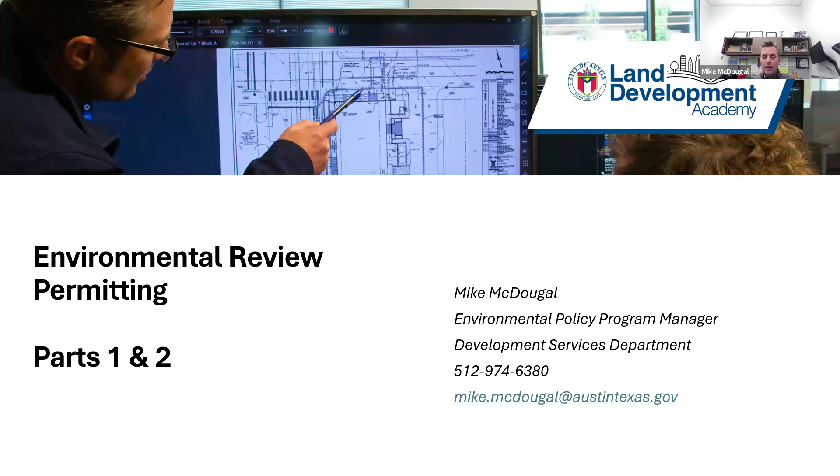Bianca had mentioned this as far as the engagement format a minute ago. Bianca, did you want to speak to this or should I go on to the next slide? Go ahead. I think I covered it. Okay, I think so. Thanks.

So we'll cover 2 hours today, probably a little bit less. We'll take a break and there will be time for questions at the end of the day and several times during the presentation. So we are covering yesterday and today a total of 8 topics. Yesterday we covered 4 and today we'll cover the next 4.

Yesterday we covered the watershed classifications and regulations, impervious cover, construction on slopes, and the grading limits and grading administrative variances. And today we'll cover critical water quality zone regulations, water quality transition zone regulations, erosion sedimentation control requirements, and landscape requirements and compatibility requirements.

And so actually that brings us to our first question break. I just want to give an opportunity to see if anybody wanted to ask a question about what we covered yesterday, clarification. So Bianca, are there any questions at this point? Yes, I do have one question that was in the chat box, but I'll ask y'all to please do enter your questions into the Q&A box. That helps me to keep track of them when I'm writing up the written summaries for everyone. But I'll go ahead and read this one from the chat.

It says, do the site plan application instructions for water quality and drainage plan requiring a payment to city in lieu of water quality pond apply? So that sounds like the fee in lieu question. That's actually reviewed by the water quality drainage team, and that's a different team than the environmental team, my team. But my understanding is that in some areas of the city, rather than providing a water quality pond, a person can pay into something called fee in lieu. It's a water quality pond fund.

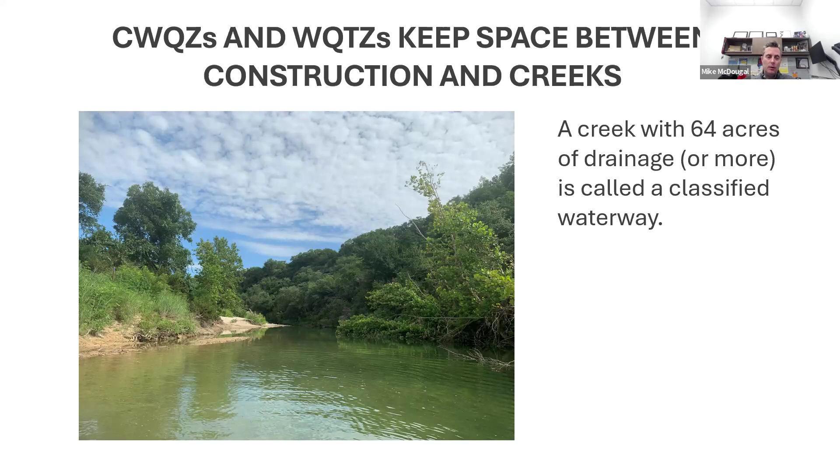And so if a creek has 64 acres of drainage or more, it's called a classified waterway. Obviously land drains to the creeks, and a certain square footage or acreage of land will drain to a creek. And so once 64 acres of land drains to a creek, it becomes a classified waterway, which means that it has this no build or low build area adjacent to the creek. That is, once a creek has 64 acres of drainage going to it, it has a critical water quality zone and possibly also a water quality transition zone. And the Land Development Code limits development adjacent to these creeks when they have at least 64 acres of drainage.

And so a classified waterway will have a critical water quality zone, or CWQZ. In the drinking water protection zone, there will also be a water quality transition zone. To give a little more background on that, a creek with 64 acres of drainage in any watershed in the city will have a critical water quality zone. If we're in the western three watersheds, water supply suburban, water supply rural, or Barton Springs zone, if there's a critical water quality zone, then there will also be a water quality transition zone. I will have a slide showing what that looks like coming up. But basically, 64 acres means critical in the urban and suburban. 64 acres in the western three watersheds means there's a critical and a transition zone.

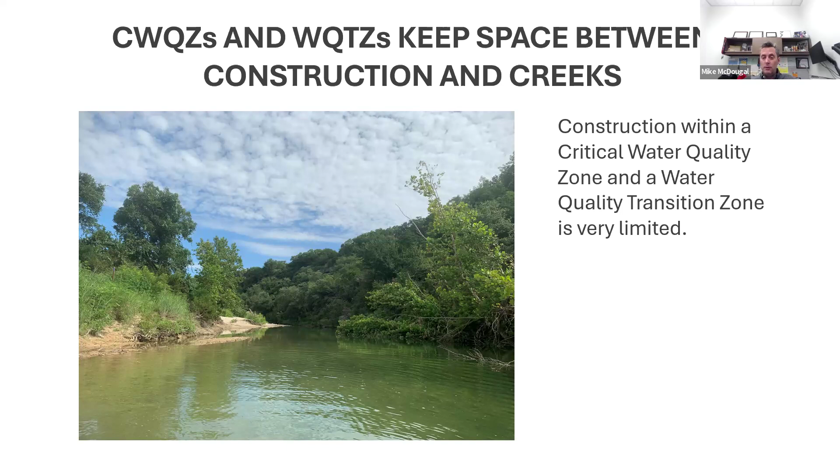As I mentioned before, construction in the critical water quality zone and the water quality transition zone is very limited. So why do we limit construction adjacent to creeks? Well, ECM section 1.5.1 says by promoting healthy soils and vegetation along the creek corridor and allowing the stream adequate space to migrate over time, stream buffers help control flood impacts, reduce channel erosion and property loss, help maintain good water quality, reduce operation and maintenance costs, and provide multiple community benefits.

To put that in simpler terms, the vegetation found along the creeks can intercept pollution and stormwater runoff, and it can slow how quickly the pollution gets to the creeks. It can also capture or break down the pollution to some extent. So having this vegetation preserved along the creeks provides free water quality for the city, so for all of us. By preserving the vegetation along the creeks, we help keep the water quality improved.

So, for example, in older parts of the city, like off of Hancock, the Yarborough Branch Library parking lot drains directly to the creek. So if you imagine any oil that leaks out of a car goes right to the creek, not very good. That was done 50 years ago or so. More modern requirements say no, you can't drain a parking lot directly to the creek. We want some space so that pollution doesn't get right into the creek right away and immediately affect the water quality.

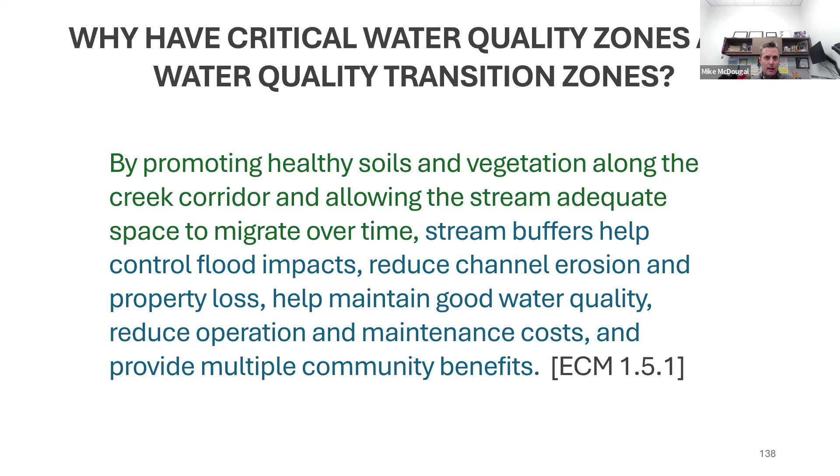Second, by preserving the vegetation, it also allows room for the animals. A lot of animals will live in or around the water. They'll live in the water, crawl out of the water to reproduce, go back into the water, and they need this vegetation along the creek as part of their habitat. So we want to preserve the vegetation for water quality, but also to keep the local ecosystem intact, give the critters space to live, reproduce, and eat.

So as I mentioned waterway setbacks a second ago. The critical water quality zones and water quality transition zones are collectively called waterway setbacks. So if your environmental reviewer says there's a waterway setback along this creek, that's just a simpler way of saying there's a critical water quality zone and possibly a water quality transition zone along the creek. It just means an area of limited construction adjacent to the creek.

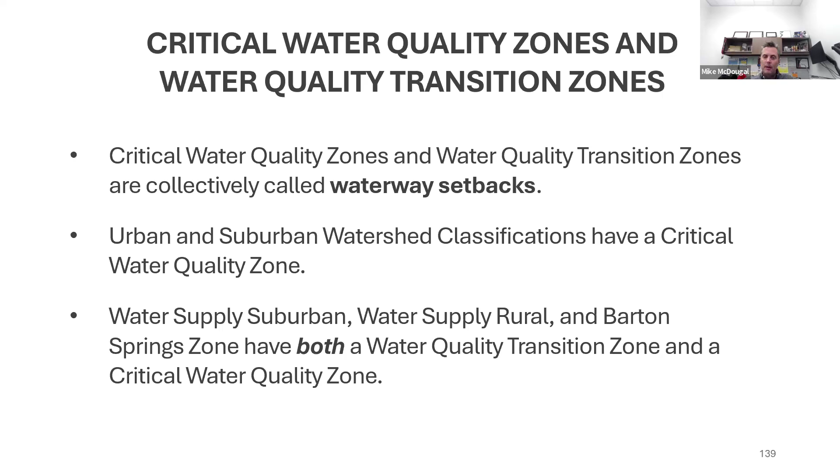Urban and suburban watershed classifications have a critical water quality zone, just the critical, when there's 64 acres of drainage. The water supply suburban, water supply rural, and Barton Springs zone have both the water quality transition zone and a critical water quality zone. And so, again, 64 acres of drainage means there's a critical.

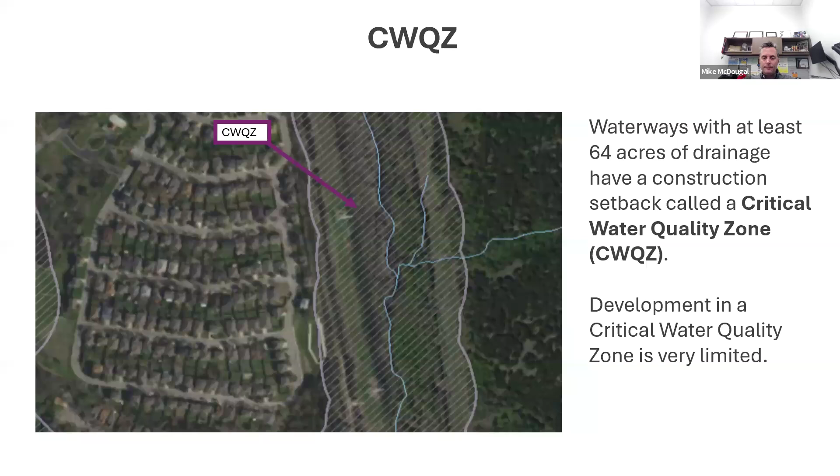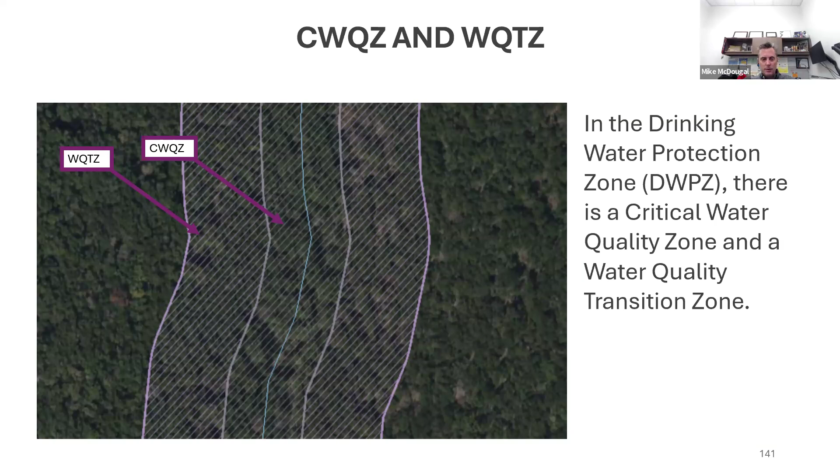This is an image from the drinking water protection zone. And so you can see the creek center line down the middle. The inner hash mark is the critical water quality zone. The outer hash mark is the water quality transition zone. So the critical water quality zone is just a band on each side of the creek. And then if there's a transition zone, there's another band outside the critical. So just a series of parallel bands limiting construction adjacent to the creek.

So what is allowed in the critical water quality zone? I mentioned there's a lot of development restrictions. Well, that's in LDC 25-8-261. And 25-8-261 starts off by saying development is prohibited in a critical water quality zone. And then it says except, and it goes into substantial detail describing what is allowed. This is also clarified in ECM 1.5.3. So fundamentally, the Land Development Code says no development in the critical water quality zone except, so thou shalt not, and then it has a lot of exclusions where, okay, you can do this in the critical. A lot of those exceptions then have additional requirements.

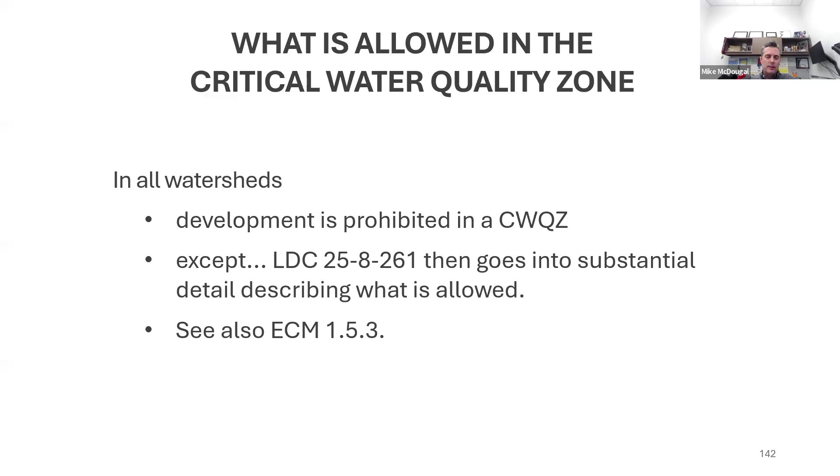So what was an example of one of those exceptions? What might be allowed in the critical? Well, the code says you can't build in the critical, and then when it says except, one of the exceptions is that utilities may cross directly into or through the critical water quality zone. Obviously, water utility power has to cross creeks. Another exception of what is allowed in the critical is a public street. Open space is allowed, and parkland is allowed in the critical water quality zone.

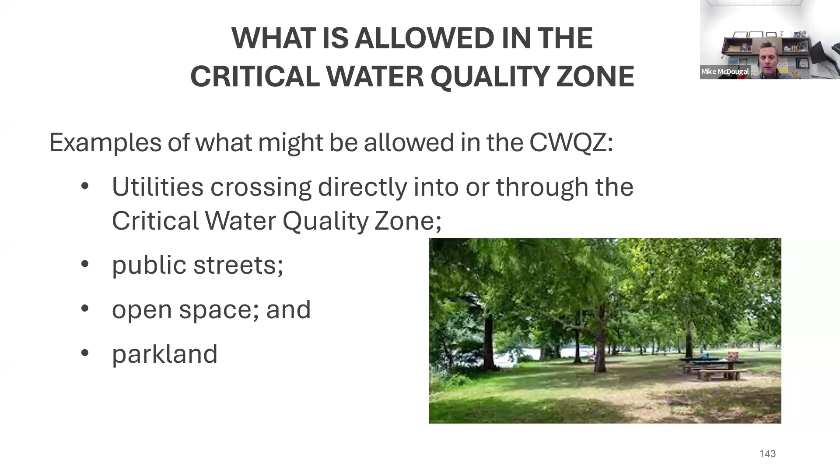So there's a long list of exceptions, and if there's a critical water quality zone on a property that's going to be developed, I would say call your environmental reviewer sooner rather than later, just to get an idea of what might be allowed, what options might exist. Certainly, it's always easy to adjust the design early in the process. But essentially, nothing's allowed in the critical except what's listed as the exclusions or exceptions.

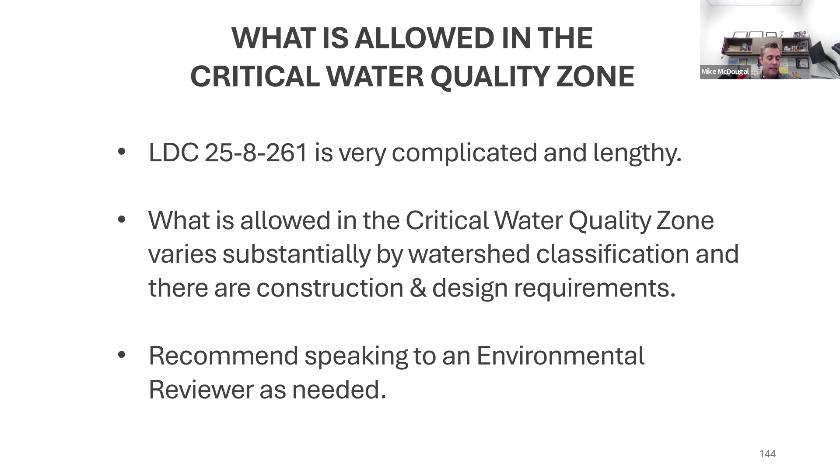So 25-8-261 is complicated and lengthy. What is allowed in the critical water quality zone varies substantially by watershed classification, and there are construction and design requirements. So, yep, as I mentioned a second ago, I recommend speaking to an environmental reviewer as needed just to get a handle on it.

Yesterday, I mentioned that there are administrative variances in the code, and they're all in 25-8-42. There are some administrative variances that apply to the critical water quality zone. Not many, but a few. So one of them is that 25-8-42 includes an administrative variance to allow a private driveway or a public street to cross a critical water quality zone if we're not in the Barton Springs zone. There are some design requirements and some conditions associated with that.

But basically, if somebody cannot access the right of way from their property without crossing the critical, it might be possible to get an administrative variance. And that can be tremendous because it's much quicker and much less expensive than a land use commission variance.

LDC 25-8-262 describes when a public road or private driveway may cross the critical. So 25-8-262 gives allowances for these crossings. If that doesn't fit, perhaps 25-8-42 will give us an administrative variance option. So there's a handful of places in code where we might build across the critical with a driveway or a street. And again, design requirements and site conditions are lengthy.

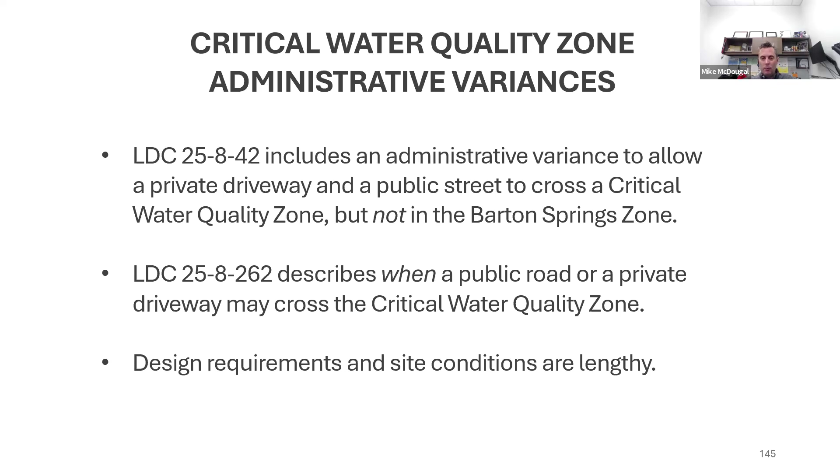So I would recommend if you're looking at a street crossing of the critical or a driveway crossing of the critical, please call your environmental reviewer to discuss that and figure out how to get a handle on that.

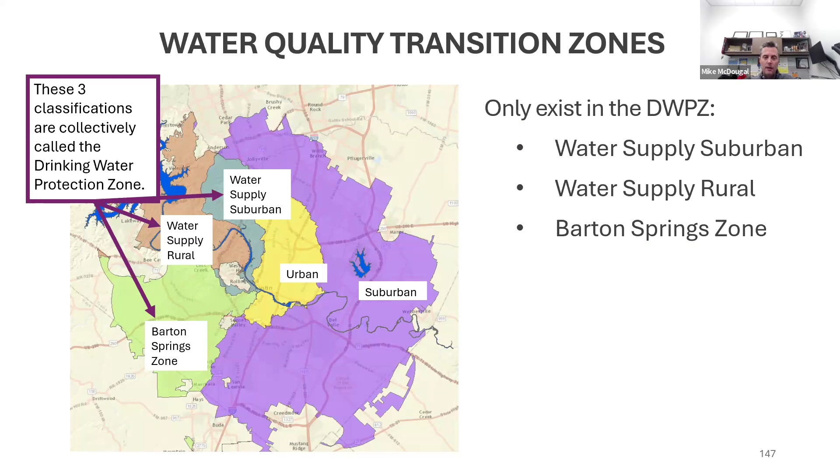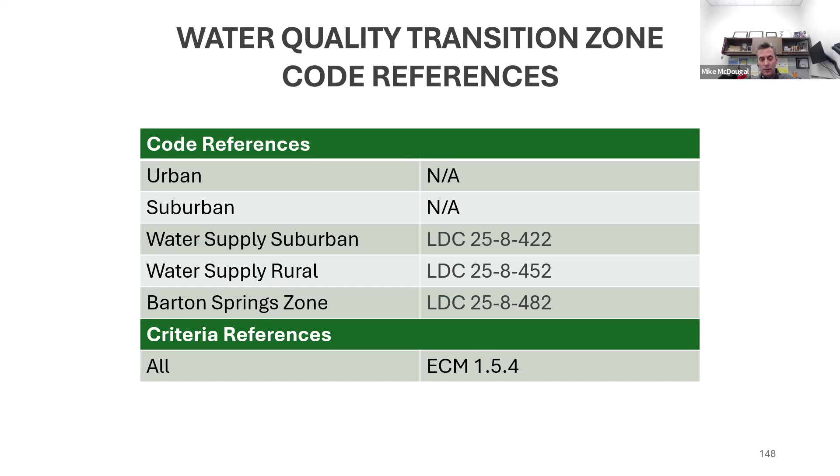So what is allowed in the water quality transition zone? Well, it varies based on the watershed classification and the recharge zone status. So if we're water supply suburban and over the South Edwards Aquifer recharge zone, whatever's allowed in the critical is also allowed in the transition zone. And also, beyond that, minor drainage facilities or water quality controls that comply with LDC 25-8-263 floodplain modification and the floodplain modification criteria in the ECM are allowed.

So what does all this mean? Well, water supply suburban plus South Edwards recharge zone, the transition zone equals the critical. Whatever's allowed in the critical is allowed in the transition zone, and also some minor drainage or water quality control facilities. And how that's defined is in the code and criteria as well. So the transition zone is typically equal to the critical plus a little bit more.

So if we're not over the South Edwards Aquifer recharge zone and water supply suburban, then it just has a lower impervious cover limit of 18%. So if we're adjacent to a creek in water supply suburban in the transition zone and not the South Edwards Aquifer recharge zone, the impervious cover limit is just 18%. This does not include the area in the 100-year floodplain.

So it gets a little bit more confusing because it's water supply suburban, not South Edwards Aquifer recharge zone, transition zone, but not floodplain. So there's a lot of layers, a lot of filters in that consideration. But once we clear all those, it's just an impervious cover limit of 18%.

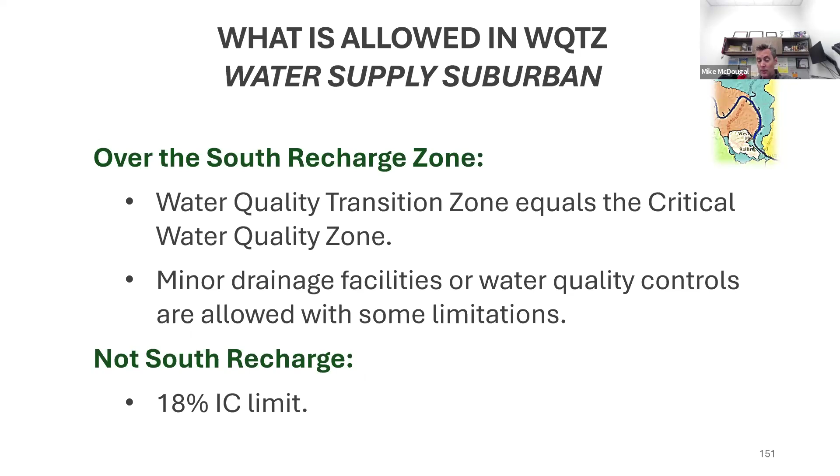So to summarize, if we're water supply suburban over the South Edwards recharge zone, the transition zone equals the critical, and also minor drainage facilities or water quality controls are allowed with some limitations. If we're water supply suburban transition zone, but not over the recharge zone, it's just an 18% impervious cover limit.

A second of the three western watersheds is water supply rural. And so if we are a transition zone, water supply rural, over the South Edwards Aquifer recharge zone, development allowed in the critical is allowed in the transition zone, plus also minor drainage facilities or water quality controls. So this is very similar to what we saw a second ago for water supply suburban. So water supply rural, transition zone, South Edwards Aquifer recharge zone: transition zone equals the critical, but also we can have minor drainage facilities or water quality controls.

What if we're not over the recharge zone? It gets very confusing because we're dealing with watershed classification, how far we are from a creek, and whether or not we're over an aquifer recharge zone. So if we're not over the recharge zone, you can do in the transition zone what's allowed in the critical. Streets or public mobility projects are allowed. Yet again, minor drainage facilities or water quality controls are allowed. And then we can have duplex or single family residential development.

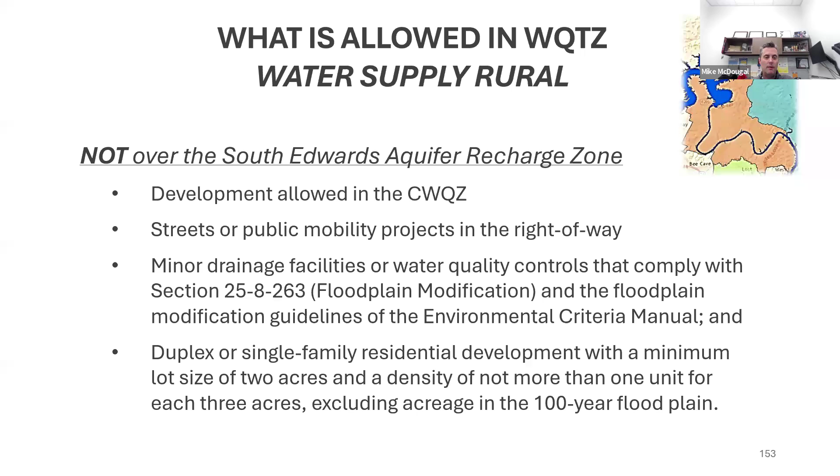And yesterday I mentioned that kind of peculiar ratio. It pops up again. So for a transition zone in this situation, duplex or single family residential development with a minimum lot size of 2 acres and a density of not more than 1 unit for each 3 acres, excluding acreage in the 100-year floodplain. So what this tells us is that we can also have single family and duplex in the transition zone of water supply rural if we're not over the recharge zone. It can get very, very detail oriented, kind of a rabbit hole. So yet again, if there's a transition zone, I recommend calling the environmental reviewer to discuss the regulations.

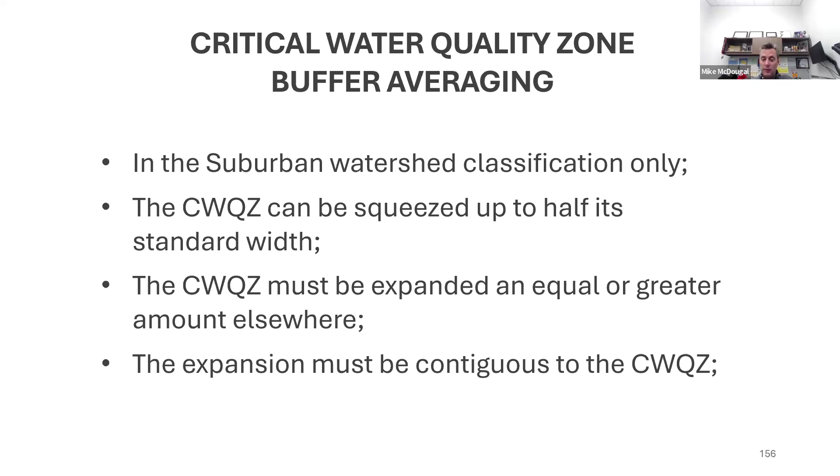Now, speaking of options, in the critical water quality zone, only in the suburban watershed, there's something called buffer averaging, just the suburban watershed and just for the critical. And so the basic concept is, rather than move the development outside the critical, we can move the critical away from the development. So the critical water quality zone can be squeezed up to half its standard width. The critical must be expanded to an equal or greater amount elsewhere. And the expansion must be contiguous to the critical water quality zone. The expansion should maintain a reasonable connection with the functions of the riparian zone and floodplain. The expansion area should not be over CEFs.

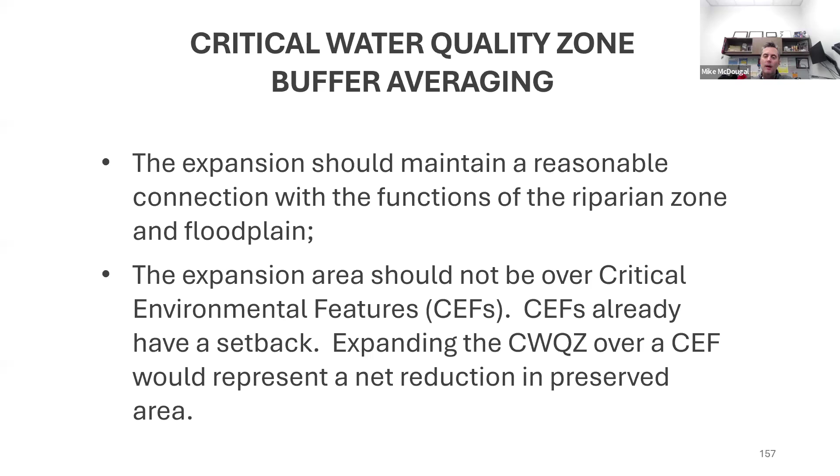What does all this mean? It's like squeezing a balloon. In the suburban watershed, you can squeeze the critical up to half its width. It's just going to pop out somewhere else, just like squeezing a balloon. And that's a very simple way to describe it, but I think it's an effective way.

You can move the critical water quality zone in the suburban watershed, just like squeezing a balloon. You squeeze it up to half its width, it'll just pop out somewhere else. These requirements are in ECM 1.5.2.D and LDC 25-8-92(B)(4). But the takeaway is there's some flexibility.

Instead of designing around the critical in the suburban watershed, maybe we can design the critical around the development. So we just move things around a little bit. And I've certainly seen that used as a helpful way to get out of variances and still comply with code and protect the water quality of the creek as needed.

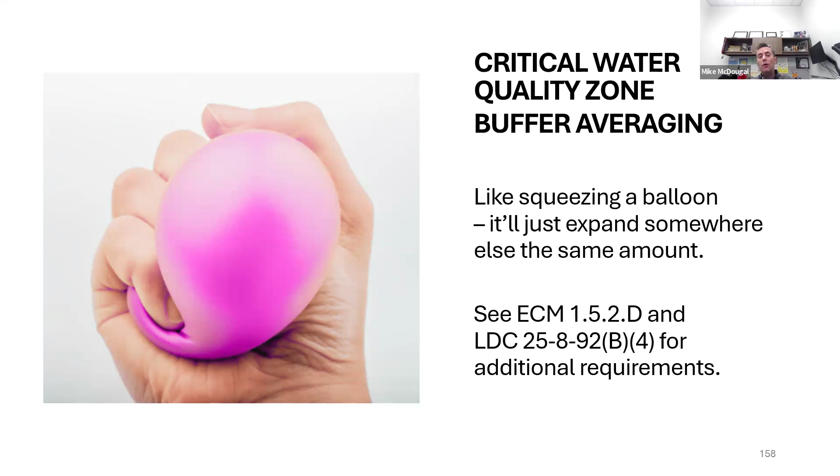And with that, I will ask if there are any questions, Bianca. Yes, we've got a couple of questions here in the Q&A box. So, first question: when a larger development adjusts the point where the critical water quality zone starts, at 64 acres, does the existing critical water quality zone still apply, or does only the proposed critical water quality zone apply? Does the same apply for the impacted water quality transition zone?

So if I understand the question correctly, somebody builds something directly upstream at the beginning of the critical, and in doing that, they change the amount of water draining to the creek. And so if they do that so that there's no longer 64 acres draining to the creek, is there still a critical? And actually, I'm not certain. Typically that's something that the Watershed Protection Department would look at.

I believe that if the development changes the flow and it's built legally into the uplands, the Watershed Protection Department would say, okay, we see there's not 64 acres of drainage anymore based on this legally built project. So the critical water quality zone would be adjusted downstream. I believe that's how that's done. It doesn't happen very often, so I can't speak to it absolutely.

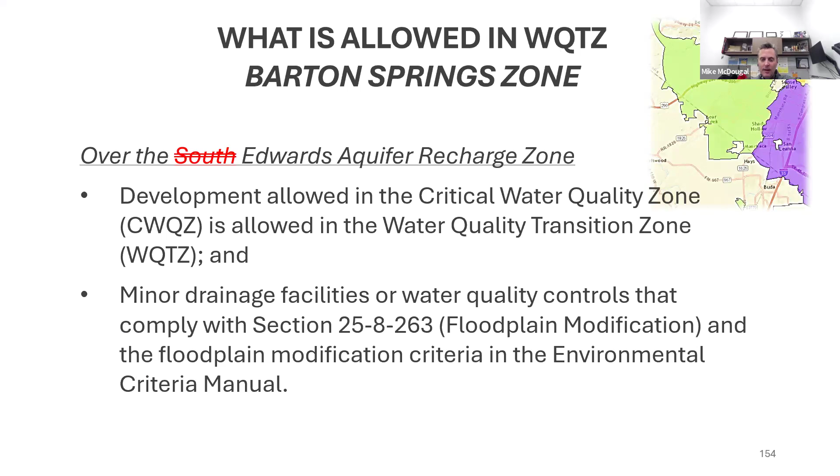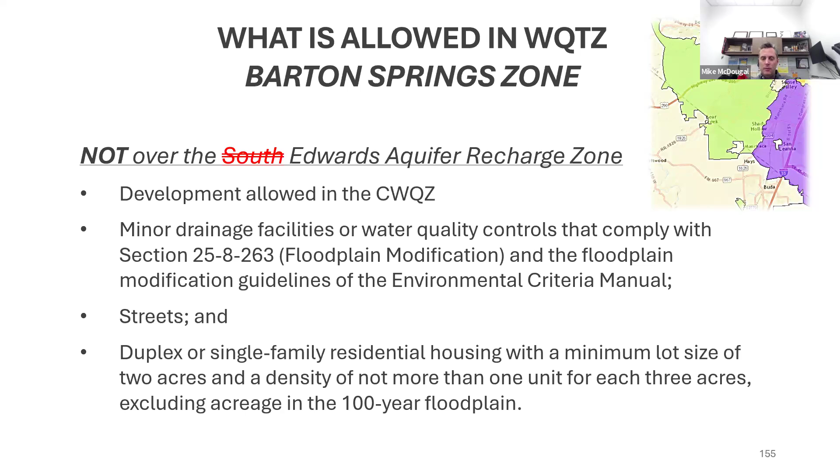Yeah, that's totally fine. We don't expect you to actually be the book, but if you can point us to the book, that's good. I can show where that is though. Okay. Minor drainage facilities have to comply with 25-8-263. And then let's see. I believe I had a criteria reference as well. It's going to be ECM section 1, but where in section 1? I would have to look. But 25-8-263 in either ECM section 1.4 or 1.5 would be the definition of what constitutes minor drainage facilities or water quality controls.

So this one's a little bit simpler, happily, since we've covered a lot of complicated material in a lot of detail. Erosion sedimentation control requirements. And that's just the 18-inch tall black fabric fence that people see around construction sites. And so when land is developed, well, actually, I'll read the slide a little more clearly.

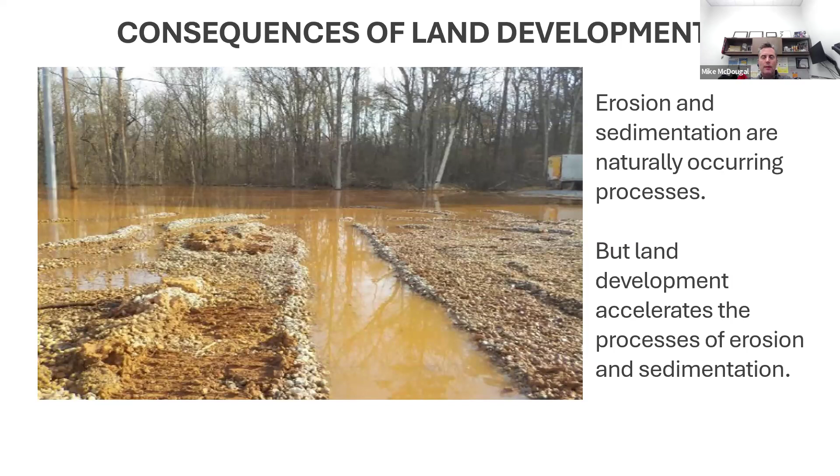The vegetation is destroyed. So when construction occurs, it's easy for soil to wash off the site. And when it washes off the site, it does this to our creeks. It's not good for us to drink this water. It's expensive to treat this water to make it drinkable. And so the City of Austin requires silt fence, erosion sedimentation control, that black fabric fence around construction sites.

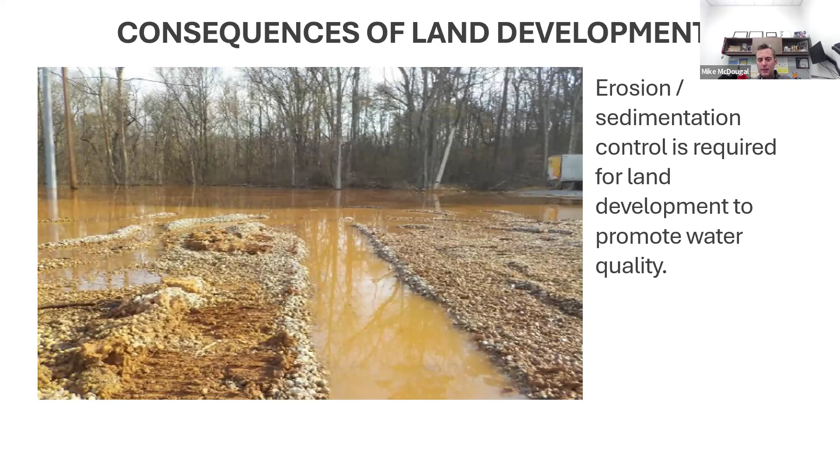So as I mentioned, sediment transport to waterways can affect water quality. Too much erosion and sedimentation negatively impact the city's drinking water supply and the ecosystem. So erosion and sedimentation control is required for land development to promote water quality. And actually, providing erosion control is a city, state, and federal requirement. The city requirements exceed the state and federal requirements.

And so there are various ways to prevent erosion from occurring. And one of them, obviously, we can put that black silt fence to hold the soil back. Another way to prevent a lot of erosion from occurring is to minimize the area of the site that is disturbed at any one time during construction. That is, minimize how much area of vegetation is removed. If the vegetation is left in place, the soil will stay in place. Preserving the existing natural vegetation to the greatest extent feasible.

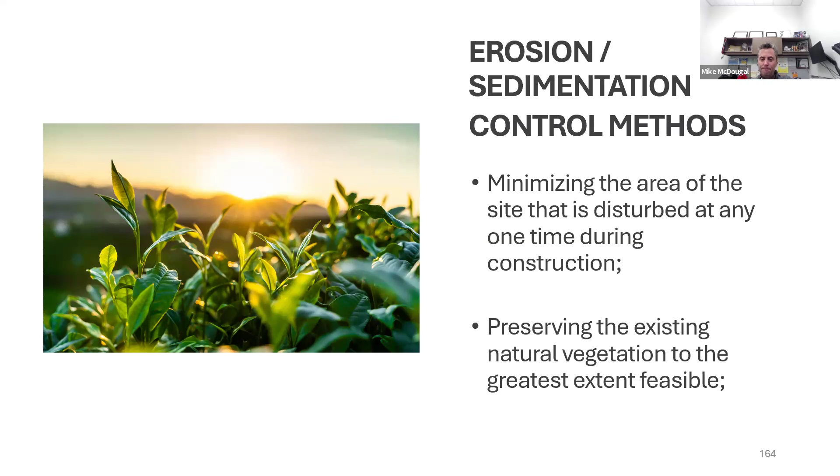Other methods are covering exposed soils with temporary stabilization soon after disturbance. So that could be a tarp. If it's a small area, that can be wood chips. That can be, I think, let's see, filter fabric. All sorts of things. We can restore the vegetation as rapidly as possible in the disturbed areas. So when the soil is exposed, get the vegetation growing back there as soon as possible to help keep the soil in place.

Keep the velocity of stormwater below the erosive level. So obviously, the steeper the site, the faster the water will run off the site. The faster it runs, the more erosion will occur. So we want to develop the flatter sites, not the more steep sites. Promoting sheet flow rather than concentrated flow. Obviously, if there's a sheet flow of water across the site, that's going to have less impact than if we just have a gully being washed out on a site, taking a lot of sediment with it.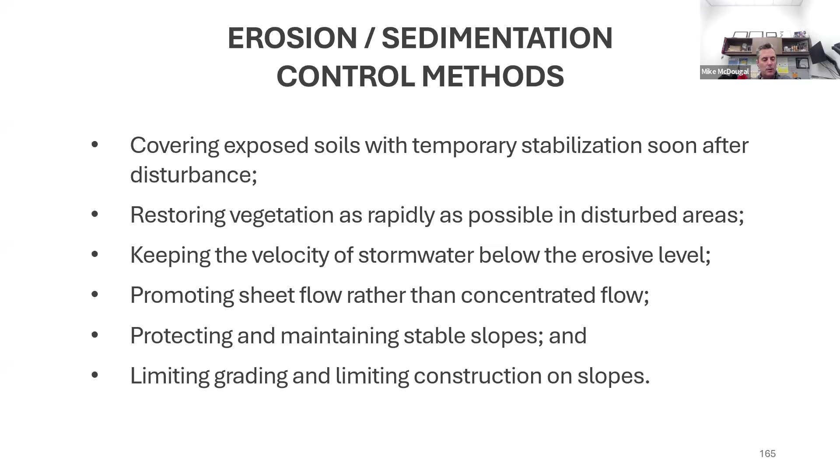Protecting and maintaining stable slopes, and limiting grading and limiting construction on slopes. So when I mentioned yesterday where the city limits the amount of fill that's allowed on a site, the city limits the construction allowed on slopes over 15%. The reason is in part to keep the soil in place. The more fill there is, the more soil can wash off during construction. The steeper the slope, the more likely the soil will wash off during construction.

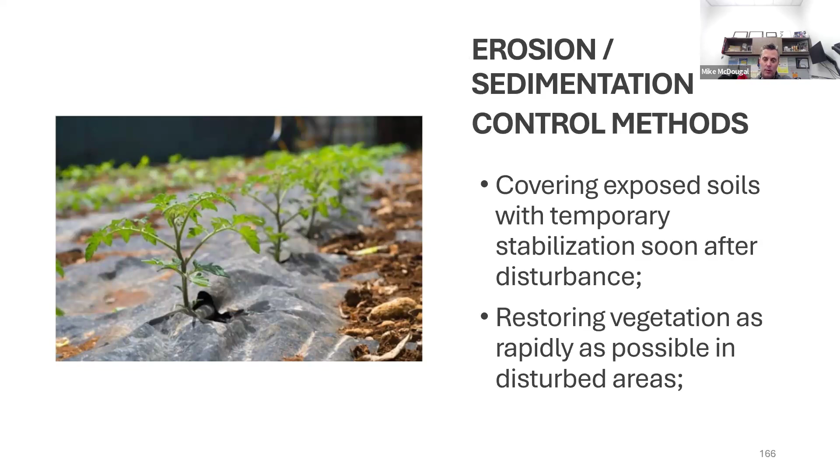So, let's see, I mentioned covering exposed soils with temporary stabilization soon after disturbance, restoring vegetation as rapidly as possible in disturbed areas. These ideas are just basically, as soon as we can, we want to get that vegetation put back to keep the soil in place, a good erosion control method.

Another way to keep the soil within the limit of construction is with temporary sediment basins and dewatering skimmers. So the ECM Appendix P1 or P4 sequence of construction says that rough grading the ponds has to be done early in the process. So if the ponds are rough graded to full capacity, those ponds can actually act as sediment basins. So in a perfect scenario, and a lot of things have to occur for this to work out properly, and that's something the environmental reviewer would look for.

If the sediment basins are rough graded at the start of construction, any soil that's washed away will find its way to those basins instead of washing off site. So we could look at sediment at the ponds acting as temporary sediment basins to capture the soil, and we want dewatering skimmers to skim the water off the top of these basins so they don't fill up. And so the idea is the water is skimmed off the top, and the sediment drops to the bottom of the pond.

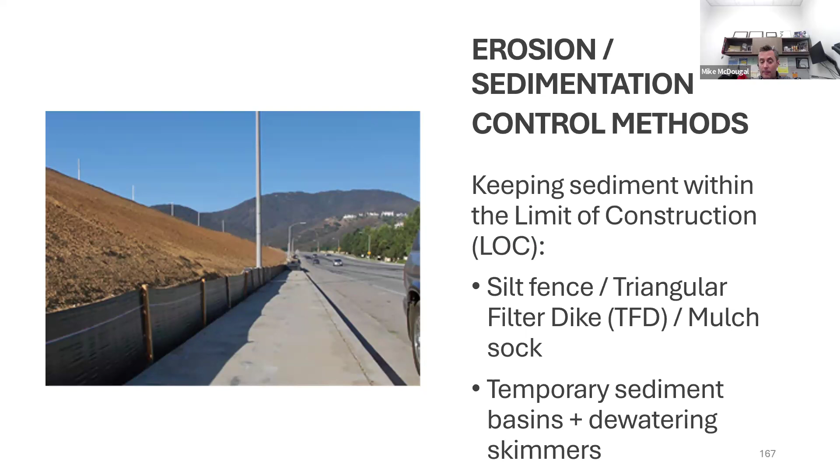So as I mentioned, silt fence is one of the erosion sedimentation control techniques. So silt fence acts as a barrier or a dam to keep surface water and sediment on site. So in this image, you can see that the water is kind of being ponded by this silt fence. If we're keeping the water on site, then we're keeping the sediment suspended in that water on site as well, which is a good thing. And so the city looks at silt fence as basically a dam.

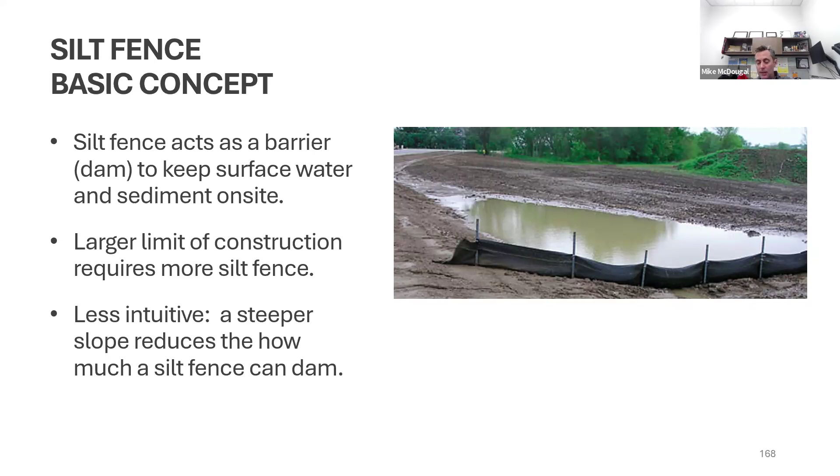And so a larger limit of construction would require more silt fence. So, the bigger your construction, the bigger the dam has to be. Less intuitive is that a steeper slope reduces how much a silt fence can dam, but I have an image for that. So if we consider this dam as silt fence, well, we can hold this whole volume of water behind the dam on a flat site. But if the site isn't very flat, that silt fence can't dam up as much water.

So a larger limit of construction will require more silt fence, and a steeper limit of construction will require more silt fence because the silt fence is effectively a dam. And as the site is steeper, silt fence holds less water behind it.

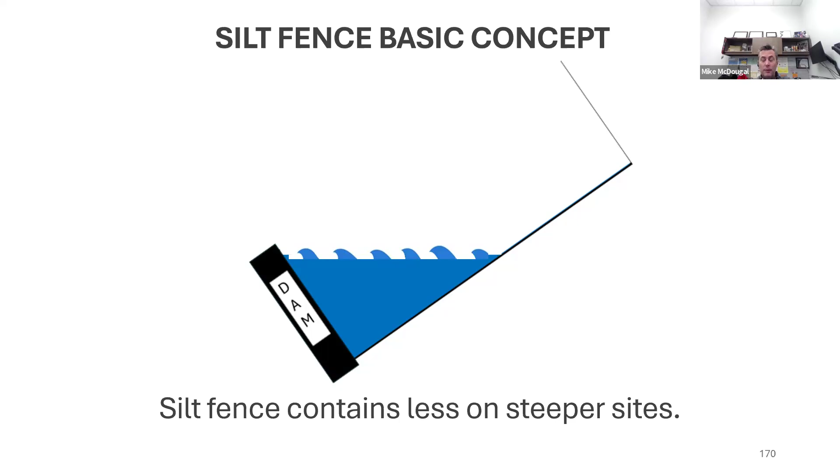Now, that is all described a little bit better in ECM Table 1.4.5.G.1. That table provides information describing how much silt fence is required based on the limit of construction area and the slope within the limit of construction. So when your EV reviewer is asking for more silt fence, it's likely based on this table. Your reviewer has probably run the numbers of the average slope on the site, the LOC area, compared that to the table and said, okay, you have to have 500 linear feet of silt fence downslope of the site to contain all the water we expect to be running off this site.

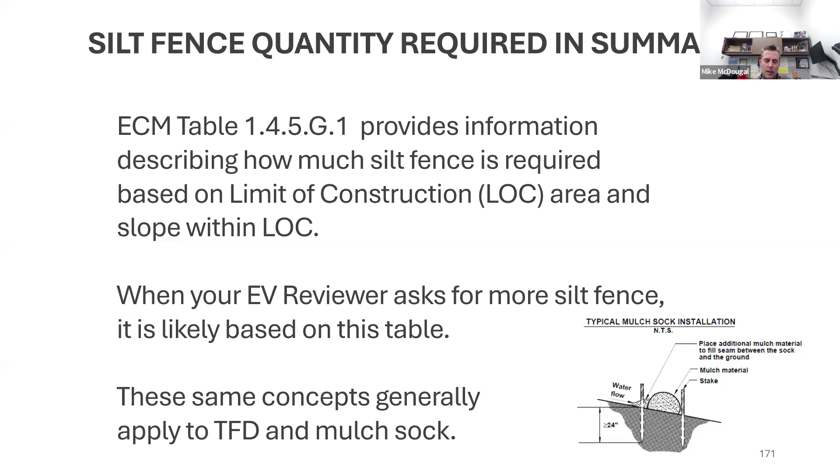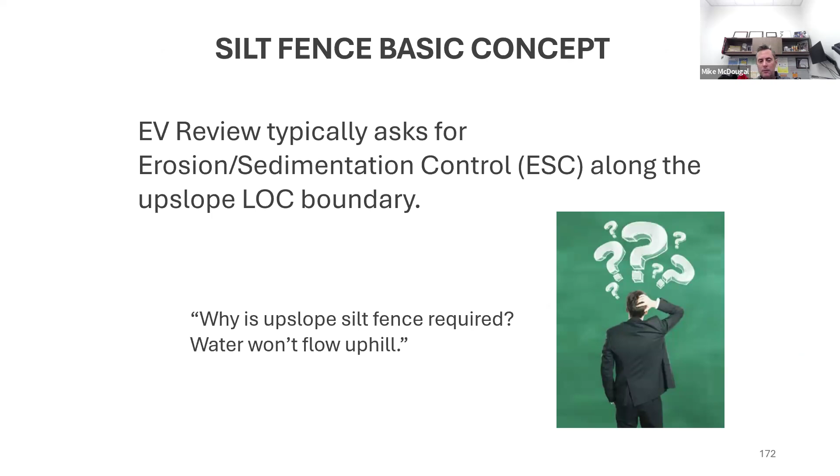The same concepts generally apply to TFD and mulch sock as well. But essentially, when your EV reviewer is saying, hey, we need more silt fence, it's based on this idea. Now, EV review will typically ask for ESC along the upslope LOC boundary. And I had an engineer reach out to me and say, why do you want upslope silt fence? Water doesn't flow uphill. That's a great point. However,

the downslope silt fence has to account for the water raining onto the site, that is rainfall, and any water that drains into the site from upslope. So the basic idea is we can either let the water run onto the site from upslope and then keep it on the site, or put upslope silt fence to act as a barrier to divert the water around the LOC to begin with so it never picks up the sediment.

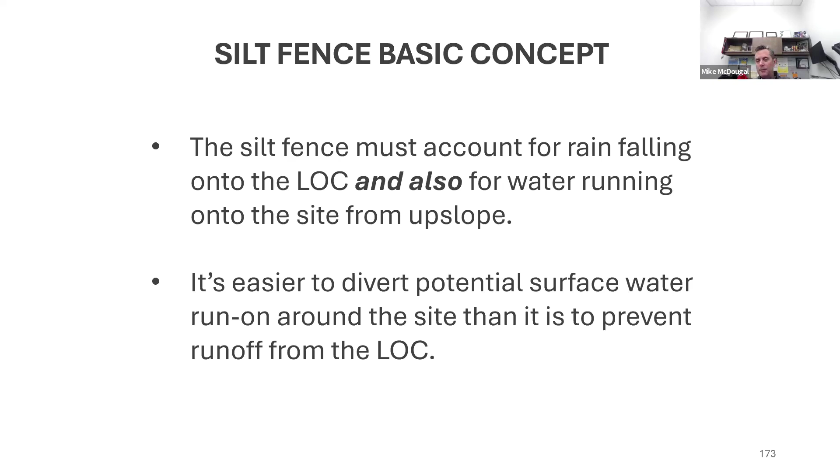And so the silt fence has to account for rain falling onto the LOC and also for water running onto the site from upslope. And it's easier to divert potential surface water run-on around the site than it is to prevent runoff from the LOC. So just don't let the water get there to begin with is the basic idea.

Now, it's not done every time, though, because upslope silt fence could possibly create drainage issues for that upslope property. And so the EV reviewer and the design engineer should collaborate on this. I've had engineers say, I can't put upslope silt fence. That's going to flood this other property. Okay, understood. But now we have to put silt fence on the downslope LOC that accounts for the rainfall and the run on from the upslope property. So the consideration gets a little more complicated. But between the engineer and the EV reviewer, we always find a way to make it work.

And best to do it during the review, rather than have the EV inspector come along during the inspection and have to adjust the silt fence with the contractor. I can imagine the contractor's never too pleased when they've got to add more silt fence after the fact. So best to get it done during the review.

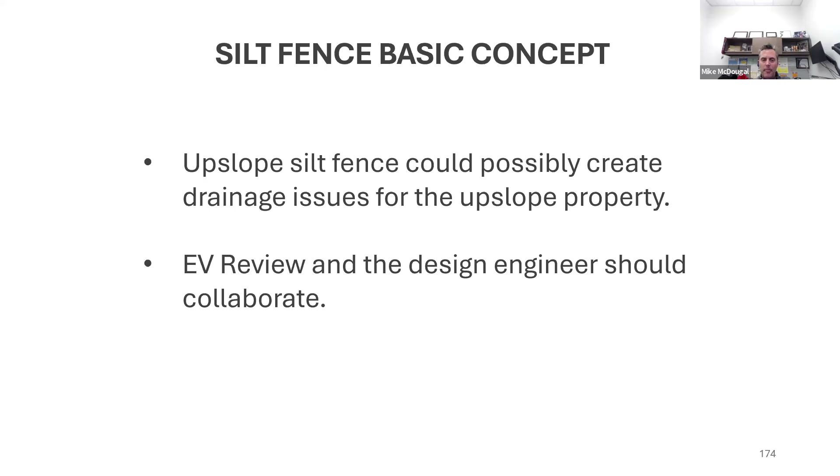I mentioned temporary sediment basins a second ago. So if a water quality detention pond is proposed as part of the construction, this pond can possibly be used as a temporary sediment basin during construction. The water is going to run to it anyway. Well, it's going to take the sediment to it. So we can use that temporary sediment basin and capture sediment there.

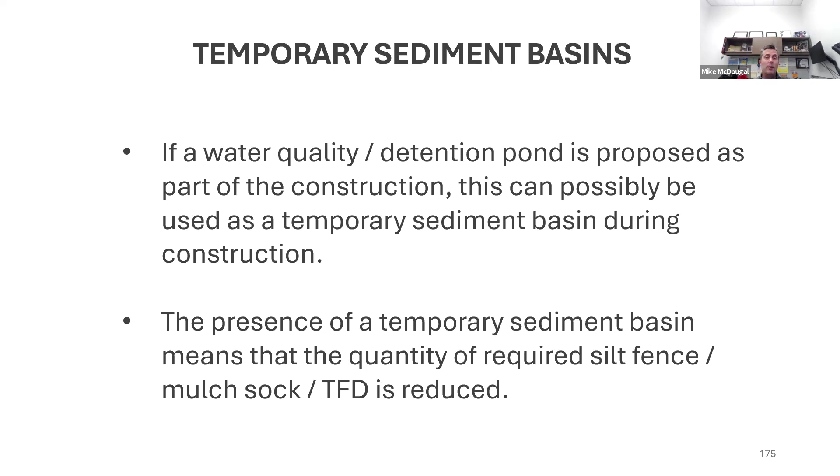And the presence of a temporary sediment basin means that the quantity of required silt fence and mulch sock in TFD is reduced. So by letting the water stay on site in those ponds, we don't have to capture as much on the downslope limits of construction. So that can be a very helpful technique as well. Okay, with that, that was erosion sedimentation control in a nutshell.

Bianca, are there any questions? I have one that just came through. Okay. How would you approach and mitigate a request from construction to cause temporary disturbance within the critical due to a lack of space in non-critical areas?

That's a good question. Typically, the interpretation of the code is that the LOC cannot enter into the critical water quality zone unless the LOC is for something that's allowed in the critical. So, for example, a utility can cross the critical. Well, if a utility can cross the critical, the LOC to build that utility must enter into the critical. So the LOC for the utility going into the critical would be allowed.

On the other hand, a parking lot is not allowed in the critical. And so generally we would say, well, if the parking lot's not allowed in the critical, the LOC for the parking lot should not enter into the critical either. The idea is to minimize disturbance in the critical water quality zone. And so if something's allowed in the critical, the LOC to build that thing is I think self-evident.

But if something's not allowed in the critical, well, then the critical shouldn't be disturbed anyway. So for a parking lot that's not allowed in the critical, the LOC for that parking lot should not encroach into the critical either. Now there might be exceptions. Maybe the critical's in just really bad shape. Maybe somebody mowed that critical, scalped it down to the ground, and encroaching into the critical is not going to really do anything.

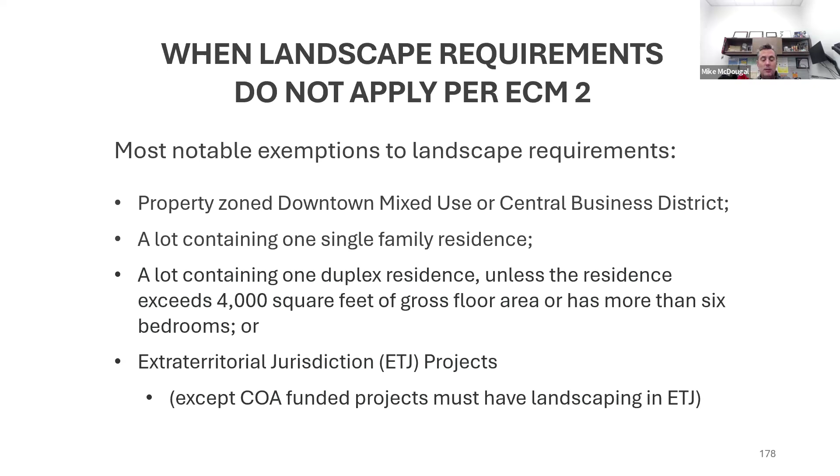So what are the landscape requirements? In summary, there's 6 requirements. And I'll have images for all of these, but first I'll just go over all of them. So at least 20% of the area between the building and the right-of-way must be landscaped or grass. And so imagine HEB. The area between the front wall of HEB and the right-of-way is called the street yard. And 20% of that street yard must have landscaping or grass.

Trees are also required between the building and the right-of-way. So based on how big that street yard is, a certain number of trees are required. Parking lots must be screened from the right-of-way with a wall or decorative fence or vegetation. So we have to screen the parking lot from the view of the right-of-way. Parking lot islands and trees are required within 50 feet of each parking space.

Parking lot islands must be at least 8 feet wide. And then on the last one, there's a minimum square footage of parking lot islands and medians and peninsulas based on the quantity of parking spaces. And so it's just a ratio. If you have so many parking spaces, you must have so many square feet of medians. Item 4 says you have to have an island within 50 feet of each parking space. Item 6 tells us how many square feet of islands we have to have. So one is a density or distribution, and one is a size requirement.

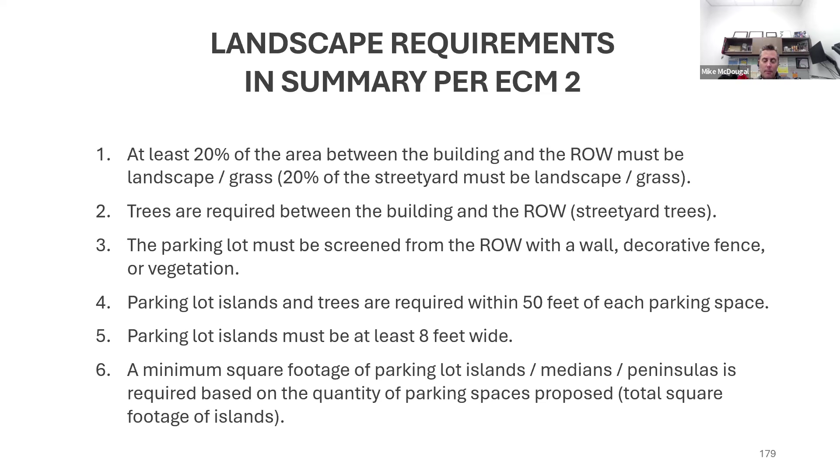But I have images for all of these because I know just reading that is confusing. So here's the street yard, the first item. At least 20% of the area between the building and the right-of-way must be grass or landscape. So there's the frontage of 290, and there's a building. That red box is the street yard area, the area between the building and the right-of-way. So 20% of that area has to be landscaped or grass or something. So your environmental reviewer would say, what's that total area in square feet? Is at least 20% of that area vegetated?

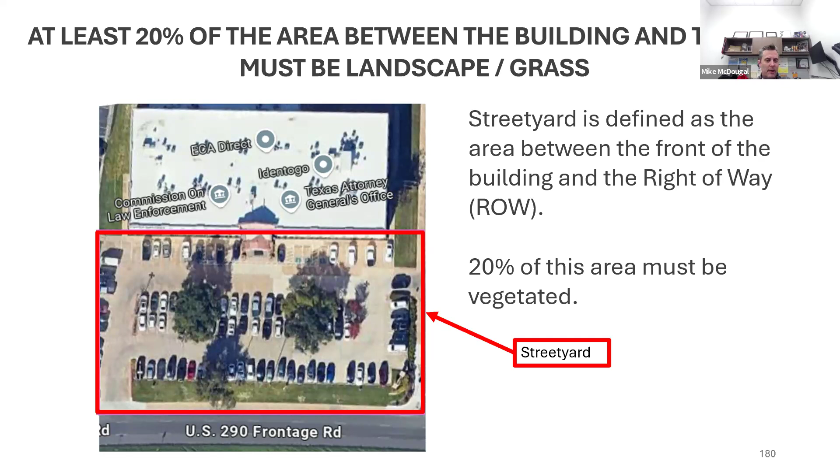Here's another example. I'll jump back for a second. This is with the parking lot in the front. 20% applies. With the parking lot behind the building, the same 20% requirement is applicable. Now in this one, almost 100% of the area is landscape. So this one, you just eyeball it and say, yes, I see that 20% of the area between the building and the right-of-way is indeed landscape. But these are just 2 different examples showing the 20% vegetation requirement.

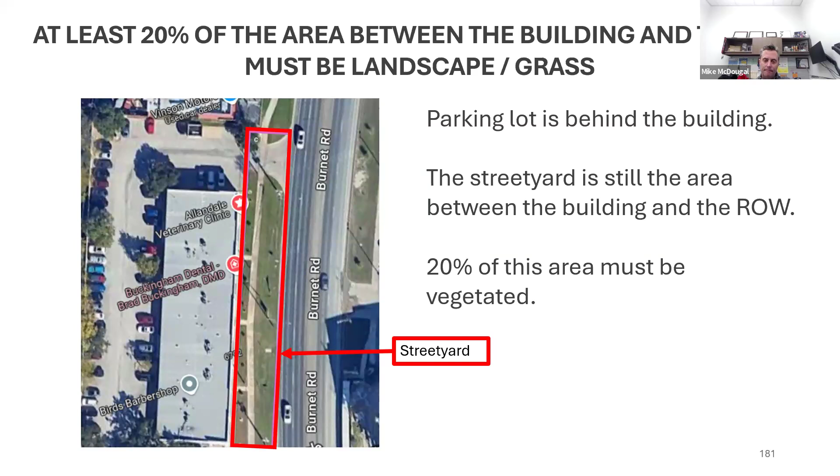But what if there is no building and the entire area is a parking lot? So what if it's a paid parking lot? Well, ECM 241B says, then the whole thing is street yard. So if there's no building, then the whole lot is considered street yard. So rather than the street yard being defined as the area between the building and the right-of-way, if there's no building, the whole lot is a street yard, and 20% of the whole lot would have to be vegetated.

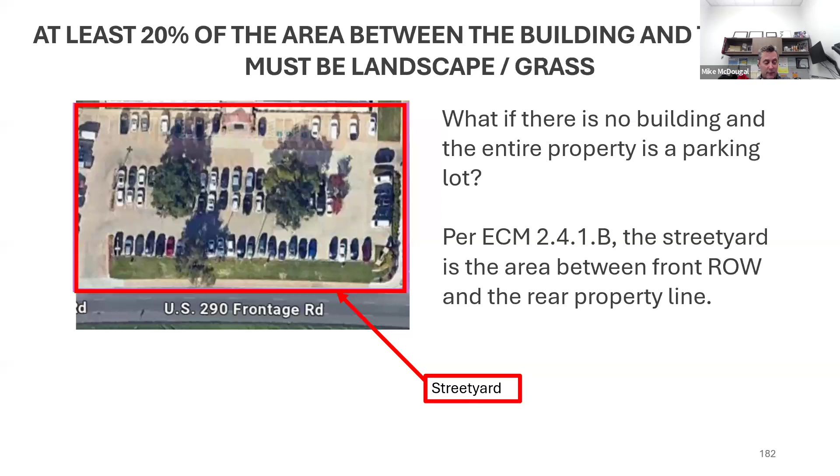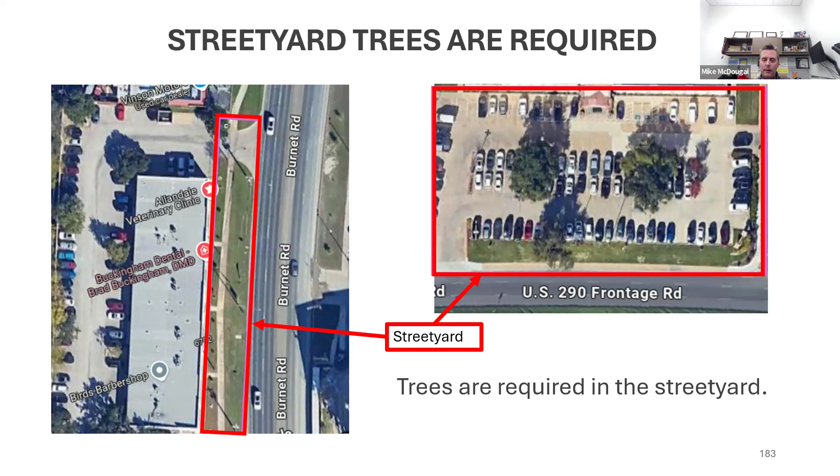Another requirement is that trees are required in the street yard. And so there has to be a certain number, a certain quantity of trees between the building and the right-of-way. Existing trees can count. And here's that ratio. So the quantity of trees required is based on the size of the street yard. And it's just a decreasing rate structure.

So if your street yard area is 1,000 to 10,000 square feet, you have to have 1 tree for every 1,000 square feet. But if you're between 10,000 and 110,000, well, this is the table. But basically, the larger the street yard, the lower the ratio of trees is required per square foot. But essentially, based on the size of the street yard, trees are required.

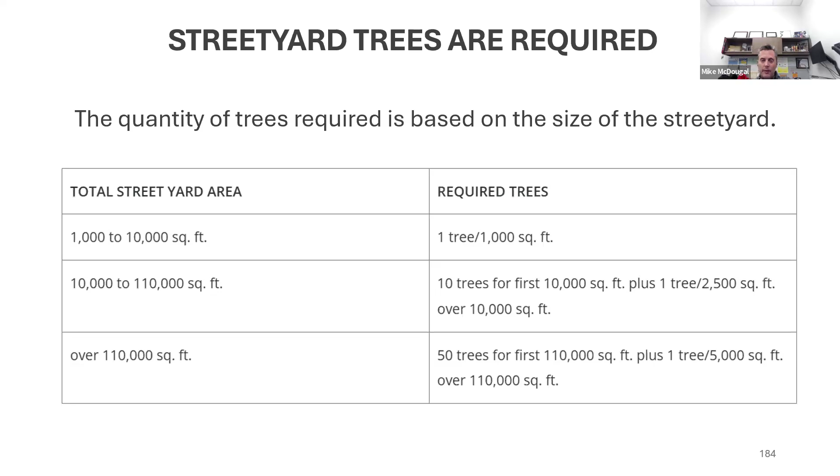Now, existing trees greater than 2 inches in diameter that meet tree preservation criteria can count. So if it's a 3-inch tree and it's preserved, then it can count for street yard trees. Also, all trees measuring 6 inches or more in trunk diameter, measured 4.5 feet above ground, shall count double. So if someone saves an 8-inch tree, that single 8-inch tree can count for 2 trees toward the street yard tree requirement. So existing trees can count, and if the tree is at least 6 inches, an existing tree can count double.

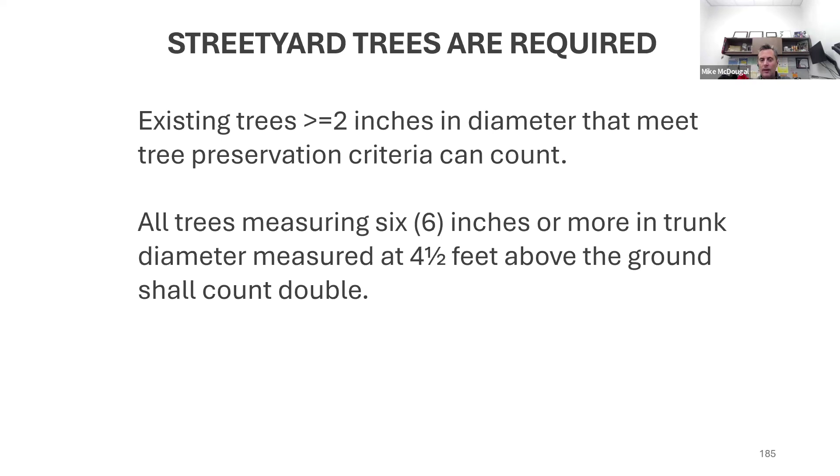Another requirement is that parking lots must be screened from the right of way. And there's a point-based system for this. So 1 point of screening is required for each linear foot of parking lot to be screened. So, for example, if the parking lot frontage along the right of way is 50 feet, then 50 points of screening is required. And screening can include trees, shrubs, decorative walls, and fences. And existing trees meeting preservation criteria can count.

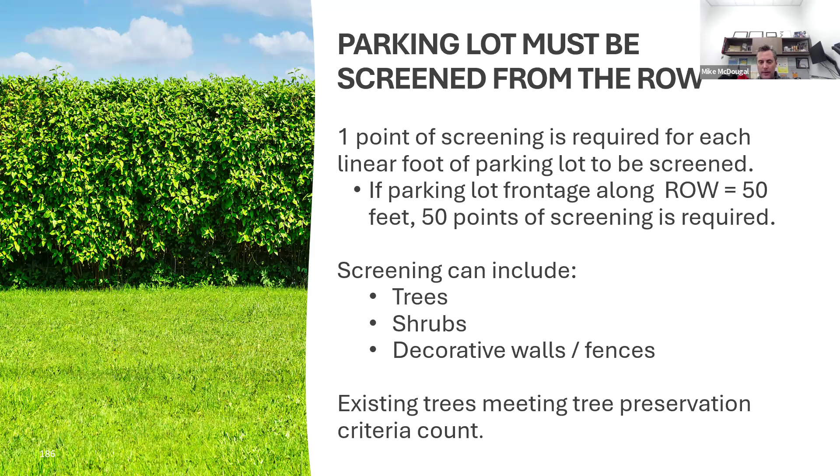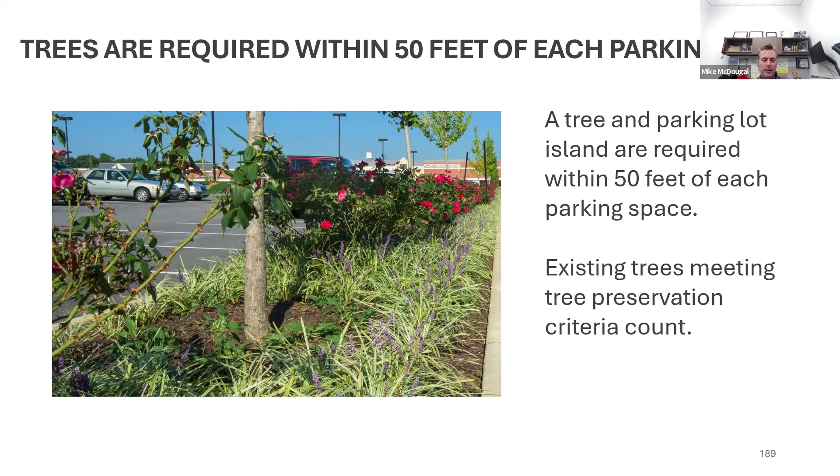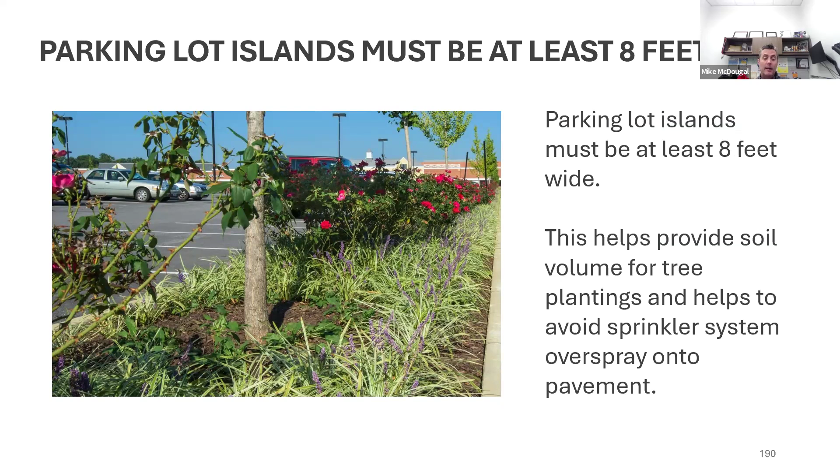Another requirement is that trees are required within 50 feet of each parking space. So a tree and parking lot island is required within 50 feet of each parking space. And again, existing trees that meet the preservation criteria can count. Additionally, parking lot islands must be at least 8 feet wide. And the idea behind this 8-foot width is it helps provide soil volume for tree plantings and helps to avoid sprinkler system overspray onto the pavement. So the parking lot island has to be at least 8 feet wide.

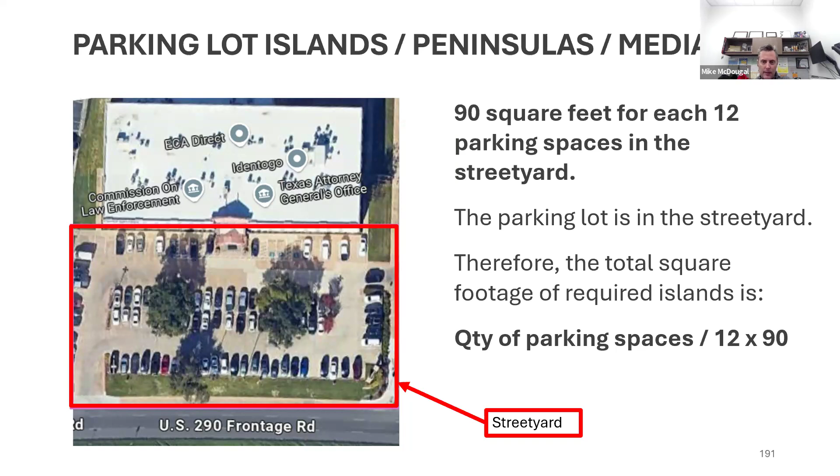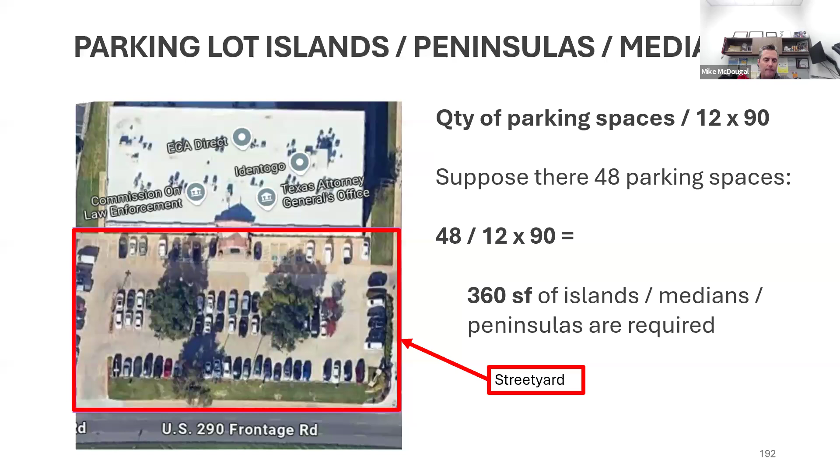And then the total square footage of the islands. So if we're in the street yard, 90 square feet of islands would be required for each 12 parking spaces in the street yard. So that's a lot to think about. But this parking lot is in the street yard. That is, the parking lot is between the building and the right of way. Then the simple formula is the quantity of parking spaces divided by 12 times 90. So to run some numbers, suppose there's 48 parking spaces here. Well, we'd say 48 parking spaces divided by 12 times 90 is 360. So 360 square feet of islands, medians, and peninsulas would be required in this parking lot.

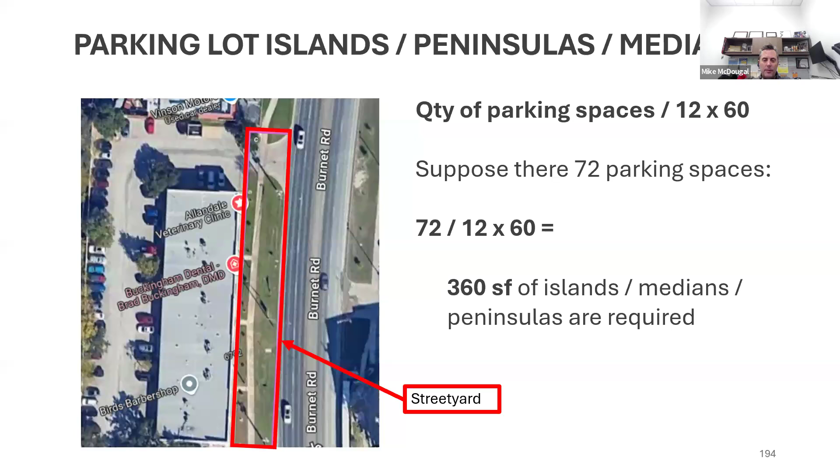Now, if the parking lot is behind the building, the ratio is a little bit different. It's 60 square feet for each 12 spaces. So the formula would be the quantity of parking spaces divided by 12 times 60. So for every 12 parking spaces in the non-street yard, we have to have 60 square feet of islands. So to run the numbers again, just suppose there's 72 parking spaces here. 72 spaces divided by 12 times 60, 360 square feet of islands, peninsulas, and medians would be required in this parking lot.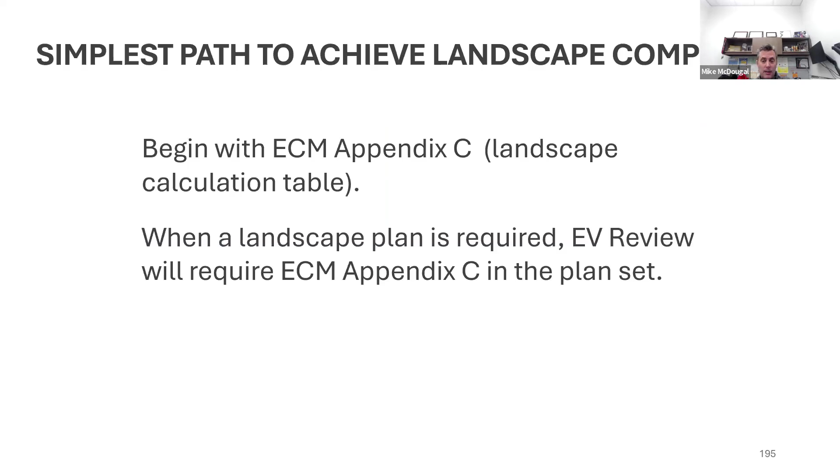Now, I know that is a lot to think about, and my best advice is to begin with ECM Appendix C. It's the landscape calculation table. And when the landscape plan is required, your environmental reviewer will require ECM Appendix C in the plan set. But if you follow ECM Appendix C and fill in those numbers, that will help guide the landscape design to compliance.

There are other planting requirements. They're not exactly landscape requirements, but they do involve landscape concepts. So vegetation is required for water quality ponds. It's a green pond requirement. And your environmental reviewer is going to ask for a planting plan for the water quality pond to be sure it meets the density, quantity, and species requirements.

Parking lot islands should be designed to intercept surface water runoff. It doesn't say shall, because there are some times where that can't be done. So, for example, a gas station, we might not want water running from the gas pumps to any islands because it could have a pretty good pollutant load. So, parking lot islands should be designed to intercept surface water runoff.

When compatibility setbacks are required, there can be a vegetation requirement, and that's if there's a proposed use that's not single family directly adjacent to a single family use. There might be a planting requirement between those two uses to help buffer the single family use from the non-single family use.

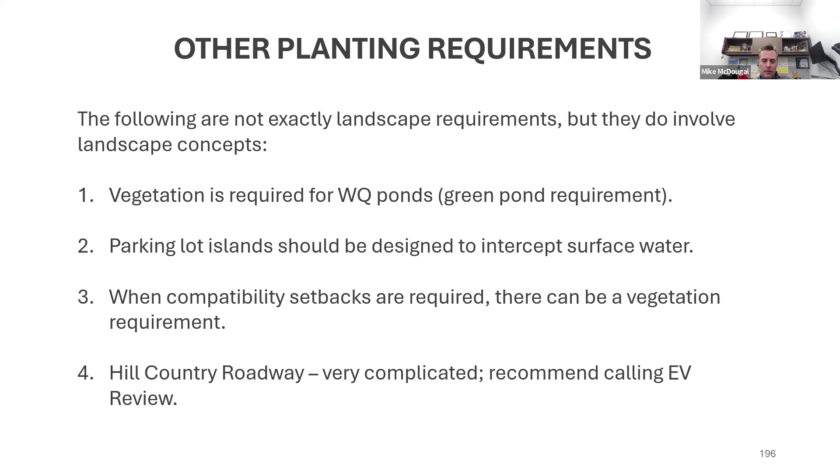And then there are hill country roadway requirements, and those are very complicated. And I always recommend calling your EV reviewer if you're on a hill country roadway. Loop 360, for example, is a hill country roadway. The results of the requirements are stunning, but the requirements are very complicated. Loop 360 is a beautiful drive, and the vegetation being preserved along there is fantastic, but the requirements are complicated. So if you're on a hill country roadway, I'd say call the EV reviewer and talk about what needs to be done.

And so we're getting close to the end. Just some final thoughts. I would say call your EV reviewer if a project site has slopes over 15%, is within a hill country roadway, if you're within or adjacent to a classified waterway, or grading over 4 feet outside of the buildings or ponds is proposed.

Now, a lot of times people will reach out to environmental review about critical environmental features. And I want to just point out, that's okay, but that's not something that my team looks at. It's an environmental issue, but it's a different team. It's John Clement's team. So LDC 25-8-281 and 282 limit construction adjacent to bluffs, canyon rimrocks, caves, faults, fractures, seeps, sinkholes, springs, and wetlands. And these are reviewed by the Watershed Protection Department.

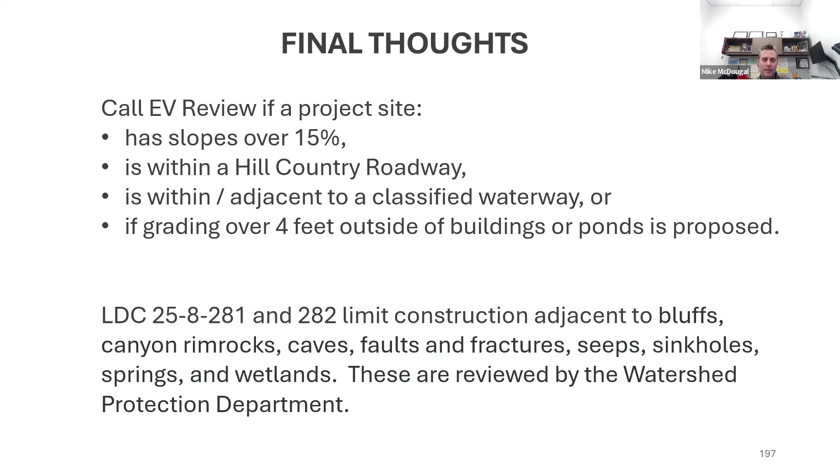Those are all critical environmental features, and people will reach out to me or my team asking about them. And unfortunately, it's not something we can assist with. And we just say that's definitely a question for John Clement. But it can be confusing. No worries if you call the wrong person, we can help get you to the right person. But if you're dealing with CEFs, critical environmental features, that's John Clement's team, and he's the best one to help with that.